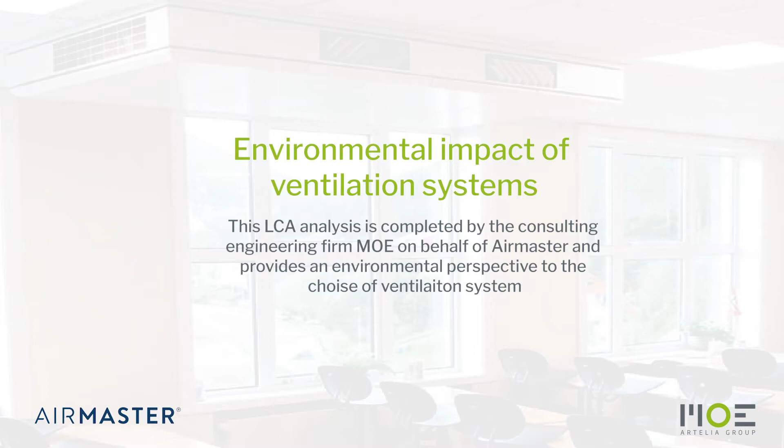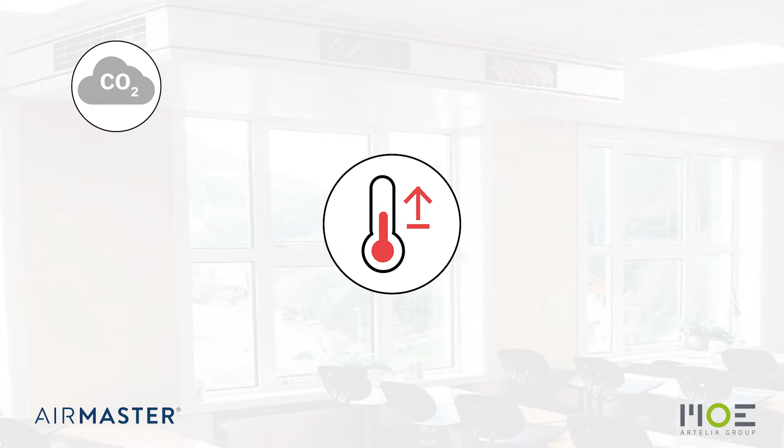Around the world, climate changes are happening faster than ever due to the increasing amount of CO2 in the atmosphere. Temperatures are rising, extreme weather is starting to occur more frequently, rainfall patterns are shifting, ice and snow are melting, and the global mean sea level is rising.

One of the biggest contributors to climate change is the building industry, which is responsible for approximately 40% of the total climate impact in the world. Consequently, the effort on reducing especially the CO2 emission from building materials and operational energy has been intensified.

As part of the building industry, Airmaster wants to contribute to this effort and has consequently asked MOE Consulting Engineers how to address this as a company producing air handling units.

One of the methods to deal with the global aim of reducing emissions of CO2 is to look at buildings and building materials in a life cycle perspective and assess the environmental impact through every life cycle stage. In other words, making a life cycle assessment.

A life cycle assessment is the most reliable and complete method to evaluate the environmental impact of any product or building as a whole. The method considers every life cycle stage, from the raw material extraction to the use stage, and at last the end of life stage.

Usually when considering buildings, the life cycle assessment is made for a consideration period of 50 years. This means that the energy consumption for all 50 years is included in the assessment, as well as replacement of materials which has a shorter lifetime than the consideration period.

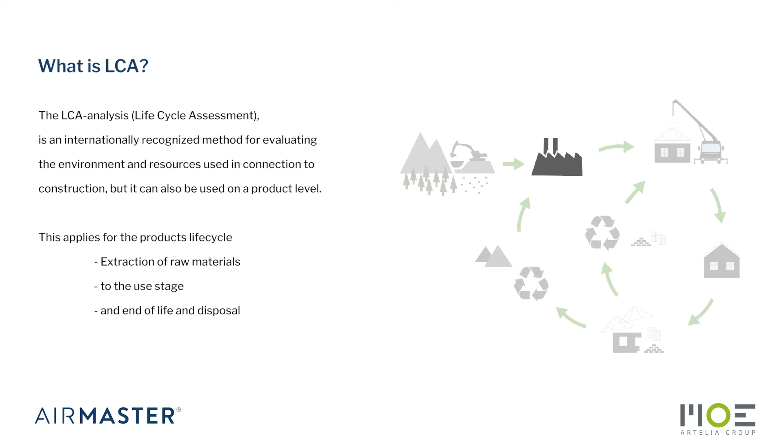Even though focus most often is on the global warming potential, the wide range of impact categories are useful when it comes to the increasing number of certification schemes, which all evaluate sustainability in a more holistic approach. For example, when looking at the 17 Sustainable Development Goals defined by the United Nations.

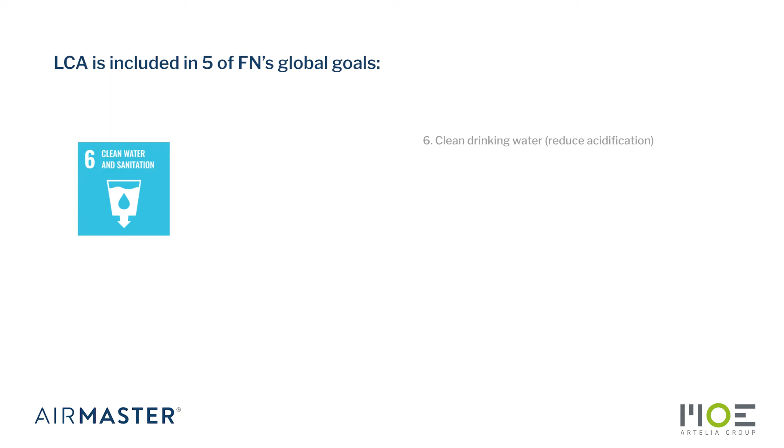Here, the method of an LCA can be used to address 5 of the 17 goals. To be specific, an LCA can be used to ensure clean drinking water and life in the ocean, defined in goal number 6 and 14.

LCA can also be used to reduce the primary energy consumption, defined in goal number 7 and 12, and of course to minimize the CO2 emission to the air, defined in goal number 13.

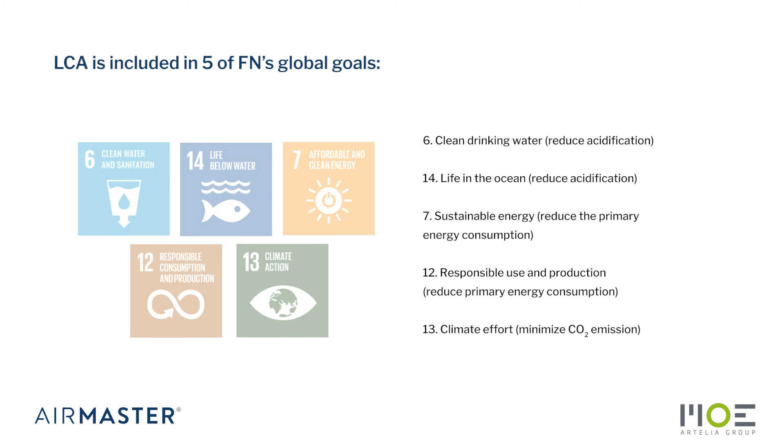Besides being useful in relation to the Sustainable Development Goals, LCA is also introduced as a requirement in the new sustainability class in Denmark. This sustainability class has 9 different requirements which all should be fulfilled. One of the requirements is to make an LCA on building level.

This LCA should include all building materials, transportation, waste, operational energy and demolition of the building after its lifetime. For now, the sustainability class is optional and in a 2-year test phase. However, it is expected to be part of the national building regulations after the test phase. At this time, a maximum value for the environmental impact is also expected to be introduced.

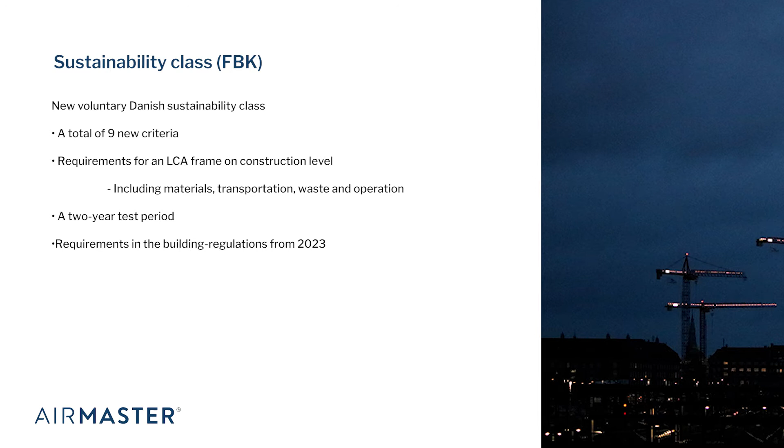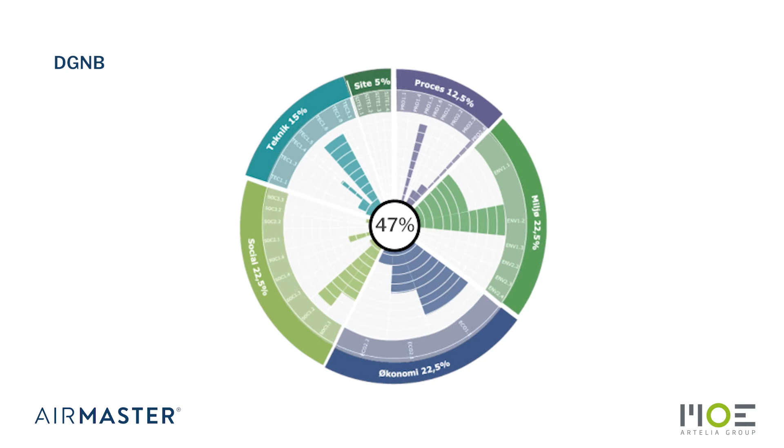In addition to the sustainability class, LCA is also included in the DGNB certification. Here, the LCA-related criteria accounts for around 10% of the total possible score. Points are awarded for making an LCA in the early design phase and for using LCA as an optimizing process to reduce the total embodied CO2 in the building.

The requirements for the LCA in the DGNB certification comply with the Danish sustainability class. However, where the sustainability class does not have an upper limit for the environmental impact, DGNB relates the environmental impact to a reference building in order to evaluate the results.

As part of DGNB, life cycle assessments on building level have been carried out for more than 10 years. Nevertheless, the assessments most often do not, or to a limited extent, include the installations for the building operation, such as plumbing, heating and ventilation.

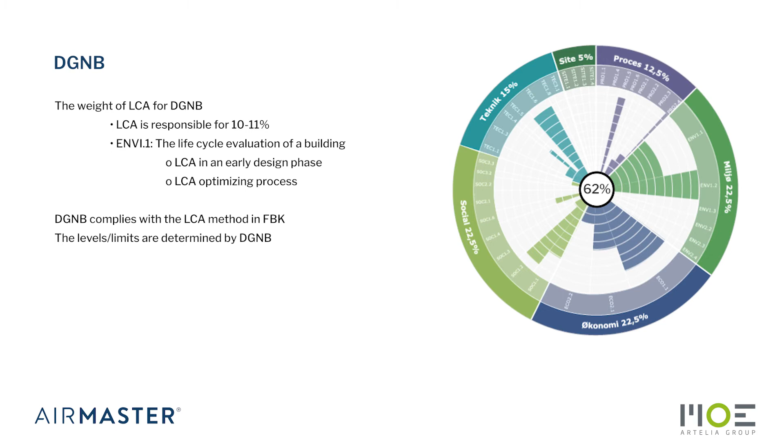Preliminary analysis indicates that a significant share of the total embodied CO2 in buildings is caused by installations, and that they may not be left out of the assessment.

Therefore, Airmaster and Moe have made a case study of the environmental impact of two different ventilation systems on a Danish primary school from 1968.

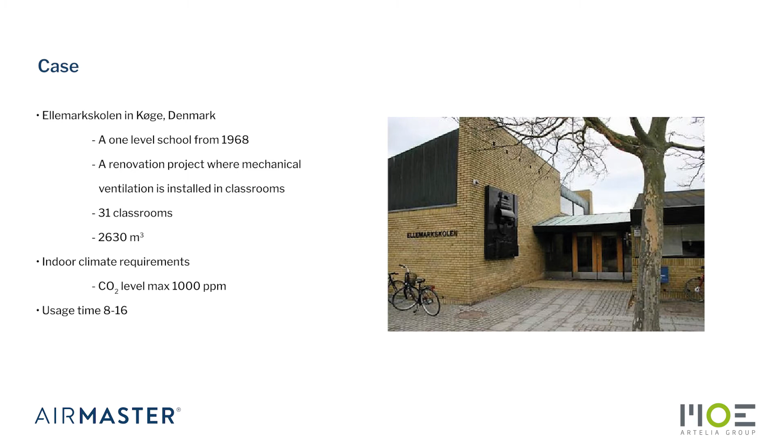The case study is based on a building section containing 31 classrooms where decentralized Airmaster units have been installed during refurbishment. This scenario is compared to a fictitious scenario where the decentralized ventilation system is changed to a centralized VAV system. On this slide, the two different ventilation systems are compared next to each other.

Both systems have the same working hours and airflow to secure a maximum CO2 content of 1000 ppm in the indoor air. So the big difference is the distribution system.

For the decentralized system with the Airmaster units, no distribution ducts are needed at all, as the air handling units are installed directly in the rooms. The centralized system, on the other hand, needs distribution ducts, dampers, diffusers and so on to work, and this has a big influence on especially the SFP value and hereby the energy consumption.

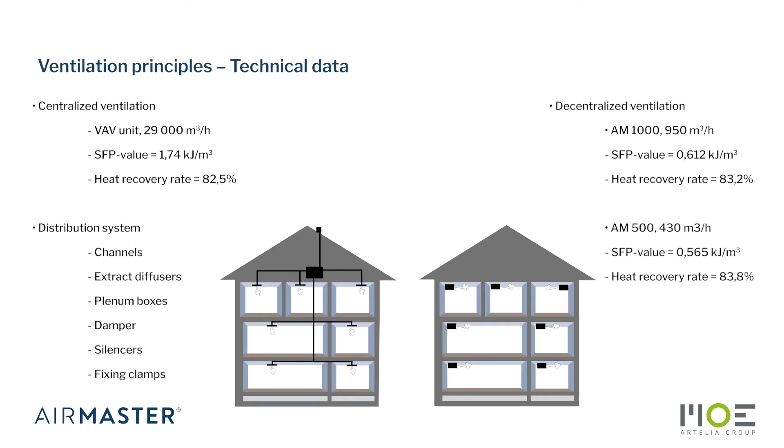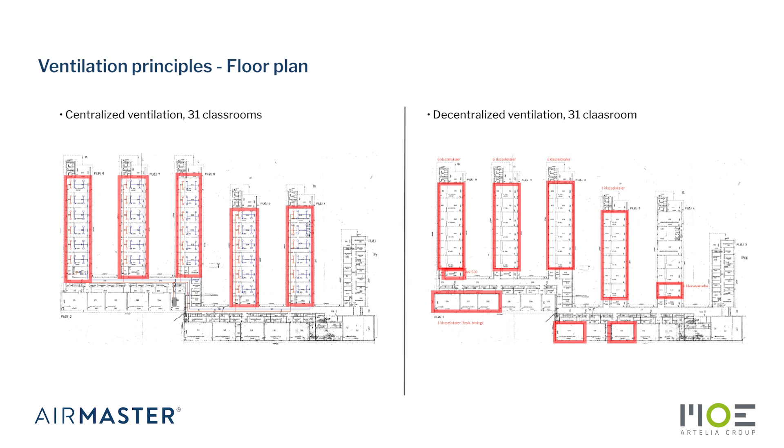To give an overview, this page illustrates a floor plan of the two different ventilation systems. The plan to the right is the actual refurbished rooms, and the plan to the left is how the fictitious ventilation scenario is composed. Because the rooms in the decentralized scenario are unevenly distributed in the building, the distribution of the rooms is changed a bit in the centralized scenario. However, the total number of rooms is unchanged.

If we start by looking at the quantities of the materials that are part of the centralized ventilation system, we can see that there's a large number of ducts and fittings and that the unit itself weighs about 3.5 tons. When added together, the centralized ventilation system has a total weight of 15 tons.

If the ducts and the air handling unit are then placed on top of the roof because there's limited space on the inside of the building envelope, insulation must be added to the material list, and then we get a total weight of about 18 tons.

On the other hand, if we look at the decentralized ventilation system, there are only 31 Airmaster units and a few ducts for inlet and exhaust through the exterior wall. The total weight of this system adds up to just over 9 tons.

This means that if we compare the decentralized system with the centralized ventilation system placed on the roof, there's a potential saving of 50% in terms of weight.

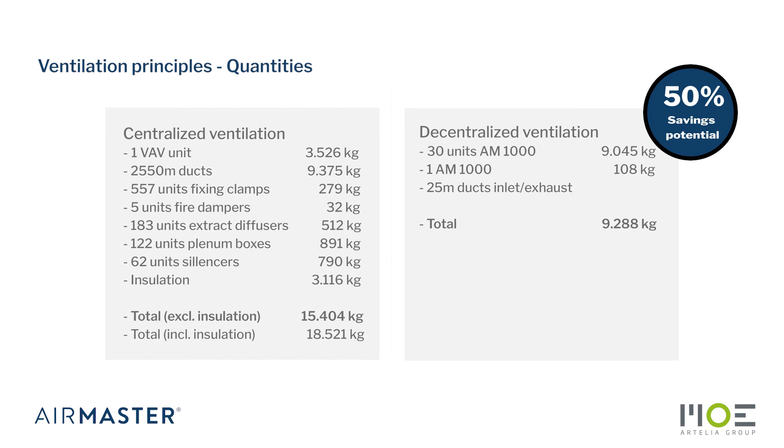So now that we have the quantities of all materials for both ventilation systems, we can start making the LCA. For this assessment, the included life cycle stages are the ones that are part of the Danish sustainability class. This means that the production and construction stages A1 to A5 are included, as well as the use stage B4 and B6, and in the end of life scenario C3 and C4.

The consideration period is chosen to be 25 years, as this is the service life of an air handling unit. But since none of the included materials in the assessment has a shorter lifetime than 25 years, no replacements are necessary. For each material in the assessment, the specific quantity is multiplied by the matching material data.

As this is a general assessment with no knowledge of the specific materials, generic material data from the German database Ökobau is used. The data for each material contains information on the environmental impact, and in this case, the amount of CO2 embodied in each material.

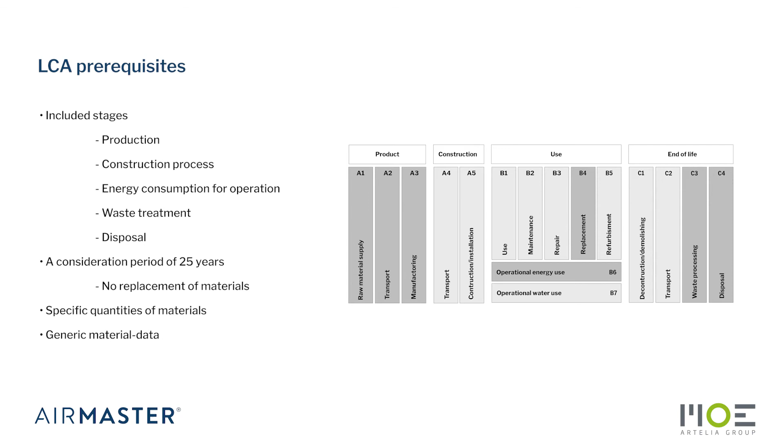As generic material data are chosen, the LCA is not product-specific, but a general comparison of two ventilation systems with the listed materials. We start by looking at the results for the centralized air handling unit itself. For fun, the results are compared to generic data for two different units from the Ökobau database.

These data are often used when making an LCA on building level. As seen on the PowerPoint, it's possible to choose between a unit with a maximum airflow of 10,000 cubic meters per hour and a unit with a maximum airflow of 30,000 cubic meters per hour.

However, when we look at the weight of the units, something is wrong. The unit with the maximum airflow of 30,000 cubic meters per hour only weighs about 170 kilos, and the supposedly smaller unit weighs about 700 kilos.

If we then look at the actual weight of an air handling unit with a maximum capacity of 30,000 cubic meters per hour, the total weight is about 3.5 tons. The embodied CO2 in this unit is 12 tons, which is more than 4 times the CO2 emission from the generic unit with the capacity of 10,000 cubic meters per hour.

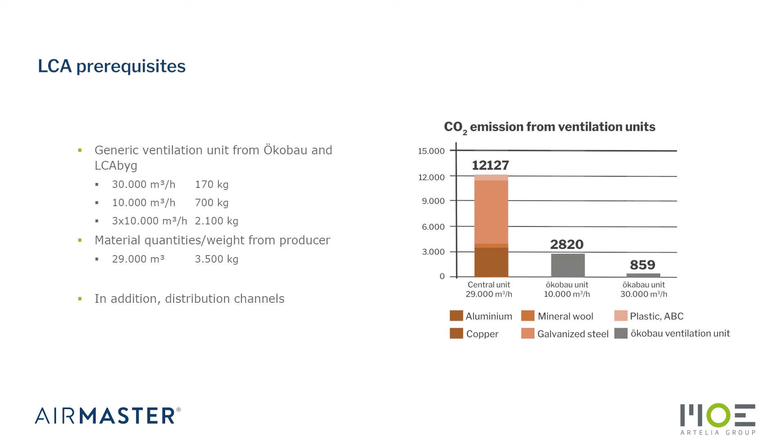This does not encourage making an accurate LCA of an air handling unit, but on the other hand, it shows that the generic data are completely wrong for these products and that new, more reliable data are needed. If we then look at the entire ventilation system, this case study has compared a centralized ventilation system with a decentralized ventilation system. Each system has 2 variations.

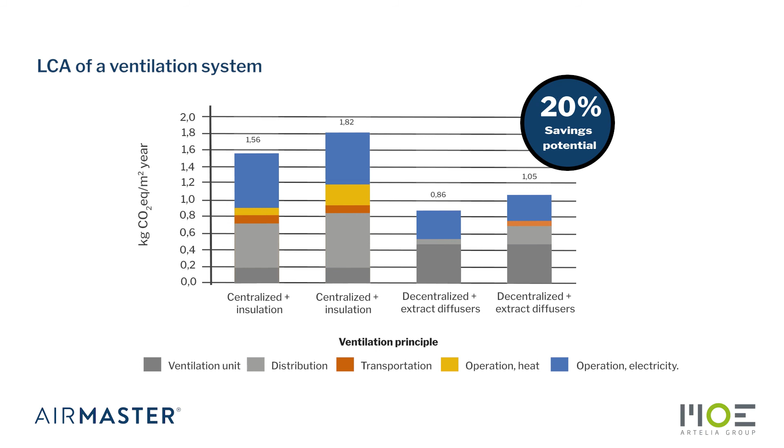One centralized solution is without insulation and one is with insulation, as this solution is assumed to be installed on the roof and hereby insulated against heat loss. As for the decentralized system, the study has compared a solution where the decentralized air handling unit works alone without extract diffusers, and one solution where air is supplied to the room through extract diffusers.

As seen on the chart, there's a potential saving of 52% if a decentralized ventilation system without extract diffusers is chosen instead of a centralized ventilation system installed on the roof. If extract diffusers are included in the decentralized ventilation system, the saving potential is 42%.

Besides the saving potential, the study shows that the decentralized air handling units make up a larger share of the total CO2 emission for the overall system. But because there are no distribution ducts, the total CO2 footprint is much lower than for the centralized ventilation system.

Furthermore, as the amount of material is much smaller for the decentralized system, the CO2 emission related to transportation is also much lower. The same picture is seen in the use stage, where the low SFP value leads to a low energy consumption and hereby a low CO2 emission.

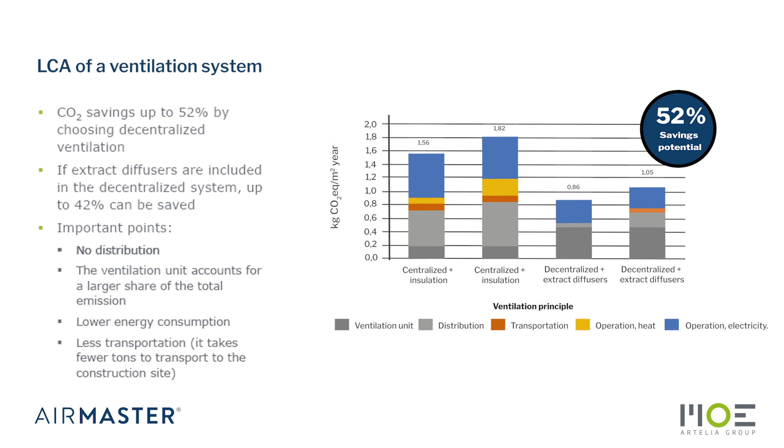Finally, if we look at a building as a whole, the chart on this slide shows how large a share the ventilation accounts for. For this analysis, a reference value for a concrete office building has been used and added to the previous results. As seen on the chart, the centralized ventilation system accounts for about 16 to 18% of the total CO2 emission, depending on whether it's with or without insulation.

For the decentralized ventilation system, the share is 10 to 12%. Based on these numbers, the study highlights the importance of including ventilation and other installations for building operation in the life cycle assessment of buildings. They make up a significant share of the total embodied CO2 and must not be left out of the assessment.

However, the current available data are insufficient or not existing. If an upper limit for the environmental impact of a building is introduced in the building regulation in 2 years, we need to put a significant amount of work into preparing reliable data.

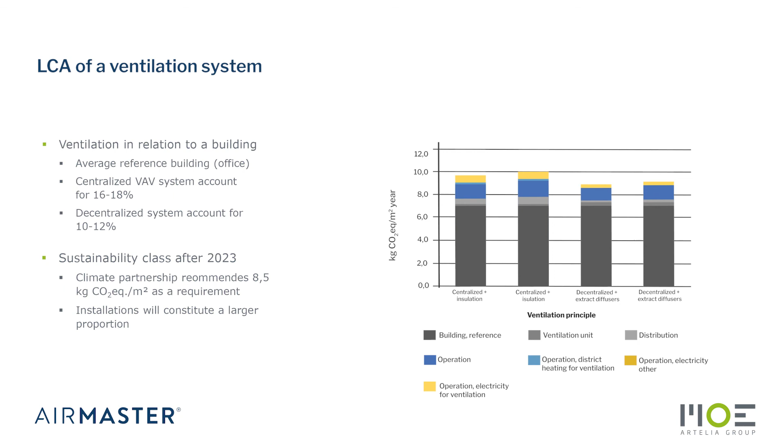To conclude, even though the presented case study is not product specific, the results show a significant saving potential when choosing a decentralized ventilation system. Depending on the specific solution, the CO2 emission can be reduced by half over a period of 25 years compared to a centralized VAV system.